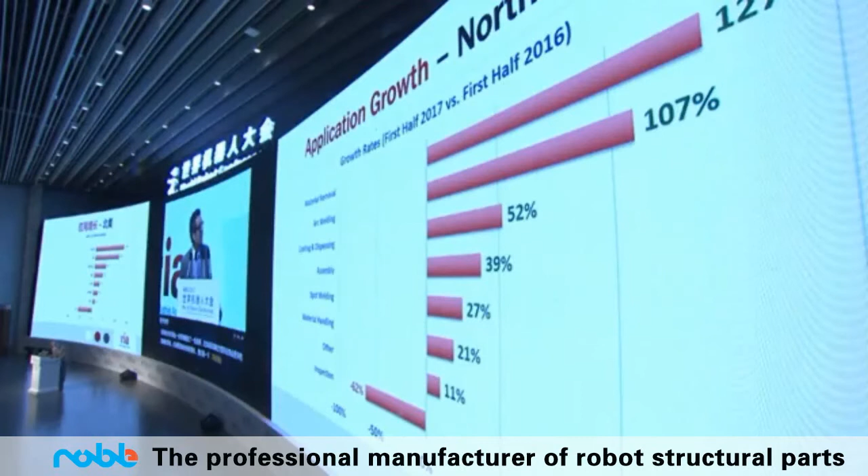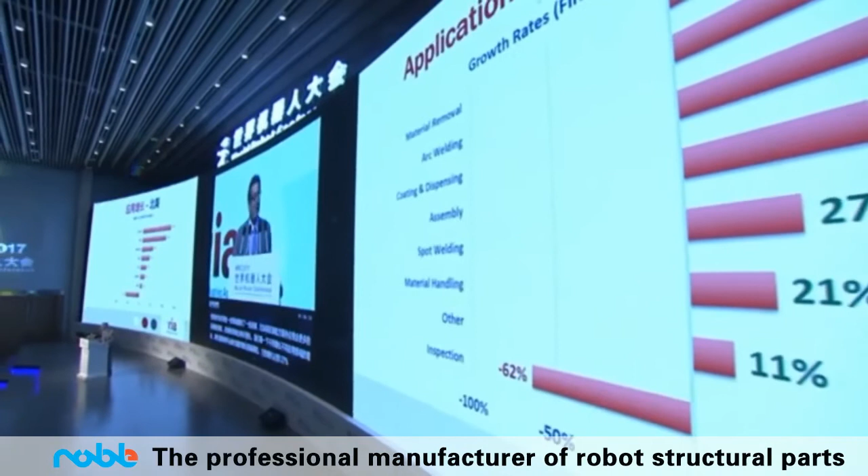As you look at these growth rates by application area, look at the tremendous growth in material removal. Small segment, but it's encouraging that we're seeing growth. Arc welding, again a big segment, growing significantly. As you go on down the line, you'll see just about every area is growing significantly, except for inspection. But again, these are small segments, so a few orders here or there can change it dramatically from year to year. The big areas like welding and even material handling, which is the largest area, are growing significantly.

So, collaborative robots is the subject of lots of discussion, not only in North America, but throughout the world. Now, in reality, there's no such thing as a collaborative robot. There are collaborative applications where people and robots are working together or in the same workspace, but there's nothing that's identified as a collaborative robot. Although, even RIA will refer to certain products as collaborative robots because it's easier, because this gives the customers an idea of what we're talking about. But there are definitions that have been established by the International Standards Organization, for instance, on what we're referring to when we talk about collaborative robots.

And these are robots designed for direct interaction with a human in a defined collaborative workspace. Collaborative workspace being a safeguarded area where the robot and human can work together at the same time. And then a collaborative operation is one in which it's purposely designed for the robots to work in direct cooperation with a human in this defined workspace.

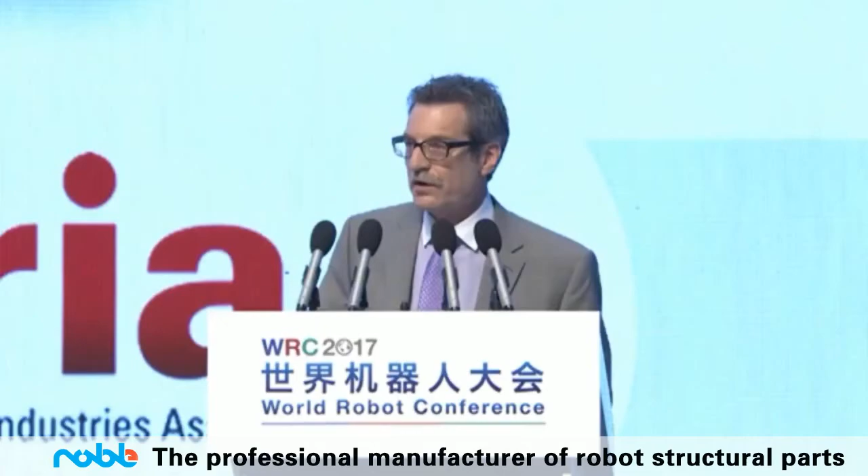Now, why is there so much excitement about collaborative robots? Well, these are the promises of this new technology: that they're simple to install and use. The great criticism of the industrial robot industry over the years, particularly by small and medium-sized companies, is that they were too complex, too costly, required too much capital investment, needed too many engineering resources internally, and so a lot of companies, particularly small companies, shied away from industrial robots. But they're very excited about collaborative robots.

Now, the costs are lower because there are no fences required for these robots. You don't have to invest heavily in these guarding systems. You don't have to have as much floor space available because the robots and the people are working in close proximity to each other. And you have reduced engineering costs because you may not even have to hire system integrators to set up the collaborative robots. So we do a series of workshops and webinars and all sorts of educational activities based around collaborative robots because there's certainly a great deal of interest.

Now, the flexibility of collaborative robots. They're not big machines that have to be in one place behind fences. They're adaptive and reconfigurable. You can move them around the plant. They're easy to train. They're portable, as I said. And so they hold a lot of benefits if indeed they deliver on these promises.

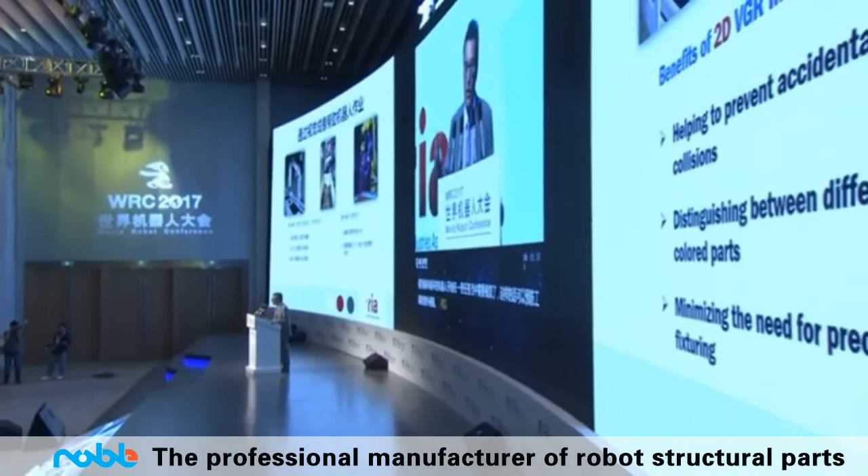And so we're seeing more and more robots with vision in tasks like preventing accidental tool collisions or handling different colored parts. And of course, bin picking, that's been something companies were working on for many years unsuccessfully, but now are able to do in most cases. So I think we're going to see continued development of machine vision as it relates to robotics.

Okay, now you get into a whole bunch of buzzwords. When I talk to people in the robotics industry in North America and throughout the world, Industry 4.0, smart manufacturing, IIoT, all these words are being thrown about as this new revolution. There's something to it, of course, as machines become connected to the internet, but making this understandable to companies has been a challenge because it seems overwhelming. There's sensors on everything and companies are being told they've got to embrace Industry 4.0 or the industrial Internet of Things. They don't really know how to do it, and a lot of companies are kind of ignoring it.

So we try to find examples related to robotics that might help them understand how it can impact them and benefit them going forward. So we talked to FANUC, one of the world's leading robot manufacturers. They're working with General Motors on a program called ZDT, or Zero Downtime Technology. ZDT is monitoring the health and stability of the robots continuously worldwide for General Motors. Now, General Motors happens to be the world's largest robot customer, we believe.

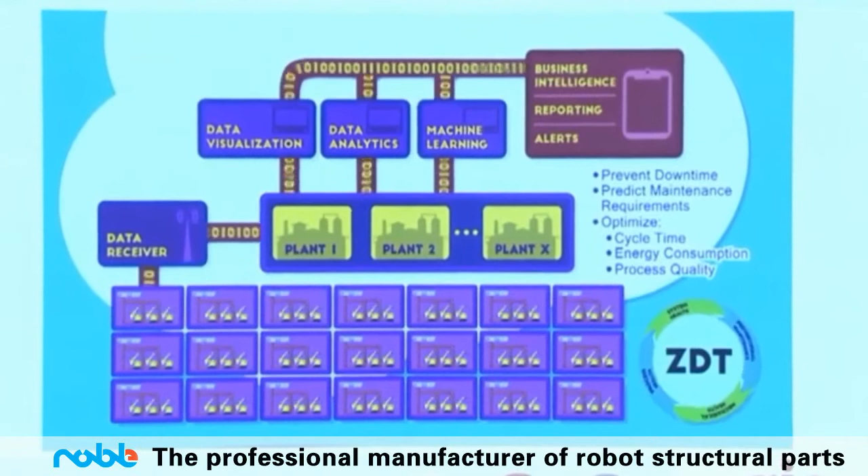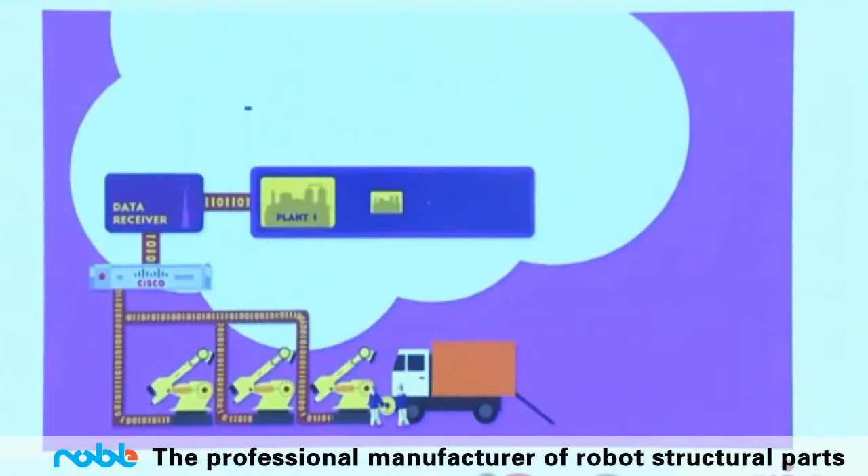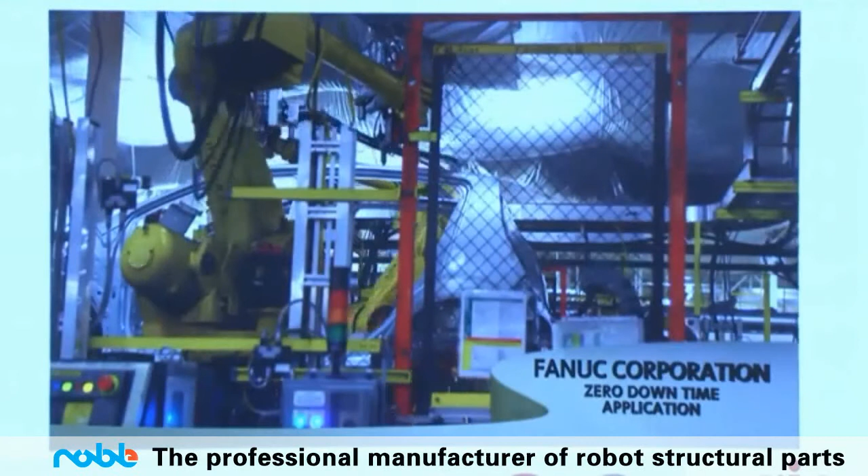ZDT is already protecting more than 5,000 robots at 26 GM factories in 4 countries. FANUC's ZDT application collects data from GM's robots every 90 seconds and analyzes it in FANUC's cloud-based data center to prevent downtime, predict maintenance requirements, and optimize cycle time, energy consumption, and process quality. For downtime, if ZDT identifies a potential issue, the customer and FANUC service team are notified and equipment is quickly directed to the site so the issue can be corrected before downtime occurs. ZDT has been 100% successful at eliminating targeted downtime and is being expanded to enhance GM's manufacturing efficiencies and world-class vehicle quality.

Okay, hopefully that also is helping lower costs of cars to the consumer.

Another big trend in the robotics market, not only in the United States and North America but worldwide, is mobile robots. When I got involved in this field, most mobile robots were following a track along the factory floor. Today, robots are moving autonomously in facilities, and it's a big deal in warehousing.

You have companies like Amazon, Walmart, or FedEx in their distribution centers and warehouses using mobile robot technology to reduce errors, speed the material flow, help consolidate storage space, future-proof their operations, and improve ergonomics. People walking miles a day or lifting or getting up on high shelves - that's not a great thing for people. It enables traceability and predictability.

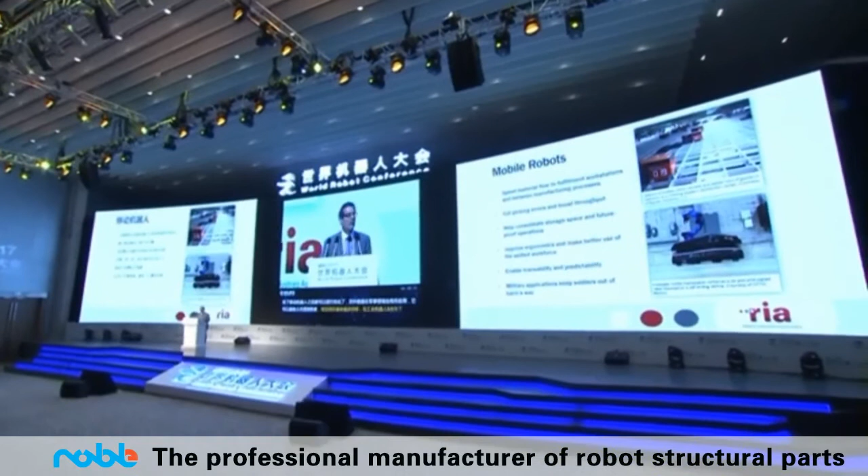And of course, we also see mobile robots in the military being used to help keep people out of harm's way. This is a big trend with mobile robot bases, and increasingly industrial robot arms are being put on mobile robot bases. This is a trend to watch - it's happening very quickly. A lot of companies are emerging in this space with very good technology.

As I said, if you go into a warehouse or logistics center, you're going to see more and more of these used, with people walking next to these robots. Their safety systems are good for the most part. There's vision used, and they're connected to the cloud in many cases. So mobile robots is a very, very important trend to keep an eye on.

Okay, government funding. We heard from the Vice Minister about government programs throughout the world, certainly the Made in China 2025. In the United States, we launched the National Robotics Initiative in 2011, and we continue to provide support - not to the extent of China or Japan or Korea or many other countries, but we are providing significant support to the development of robotics in the United States.

This Advanced Robotics Manufacturing Innovation Hub is part of the Manufacturing USA network, which we hope is going to revitalize American manufacturing and incentivize companies to invest in new technology developments. It's based in Pittsburgh, Pennsylvania, around Carnegie Mellon University.

There are state and local governments involved, universities, nonprofit organizations such as our own from all across the country. So far it's about a $250 million program, with the bulk of it coming from industry and about $80 million in federal funding. It just was recently launched - they're still getting their programs together, but there are certainly significant hopes that it will help speed the development of robots and get it into the hands of more companies in the U.S.

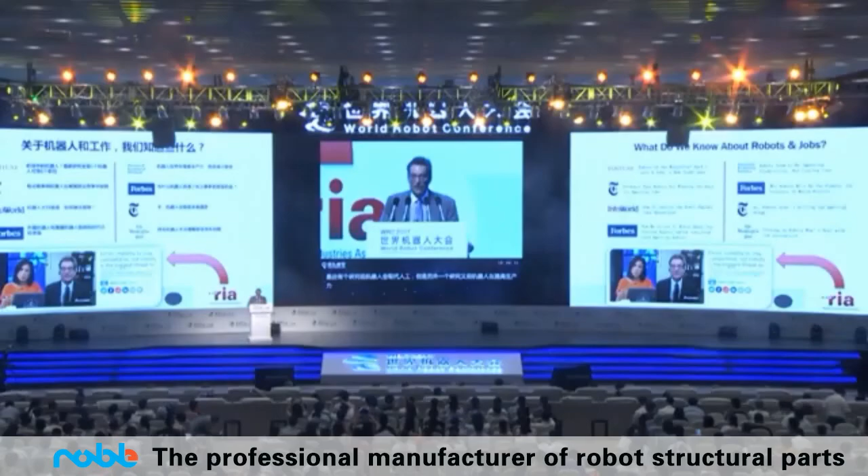Okay, I told you I'd talk about robots and jobs because this is what I talk about just about every day. People are calling, saying they read a study or there's another article out that says robots are job killers. Of course, you can go to another study and another article and see that robots are helping improve productivity and they're not killing jobs. I feel like this is all anybody wants to talk about when they talk about robotics - the impact on jobs.

So let me briefly describe our position on this. We believe that the real threat to jobs in America or anywhere else in the world is when companies can no longer compete, because that's when every job is at risk. And so automation is often used to help companies compete, allowing them to build better products at a lower cost and have the opportunity to win jobs they might not have otherwise won.

We have a website, a3automate.org, with a series of videos talking to small businesses and large businesses about why they automated and how it helped them compete. Many of them say, since they introduced the robots into their company, they won new business that allowed them to hire more people than they had before they introduced the robots. So we talk about these case studies frequently.

But for us, this is an issue that's not going away anytime soon. We try to back up what we say with facts. So we've been reading studies that said that as the use of robots accelerates, more and more people are going to lose their jobs.

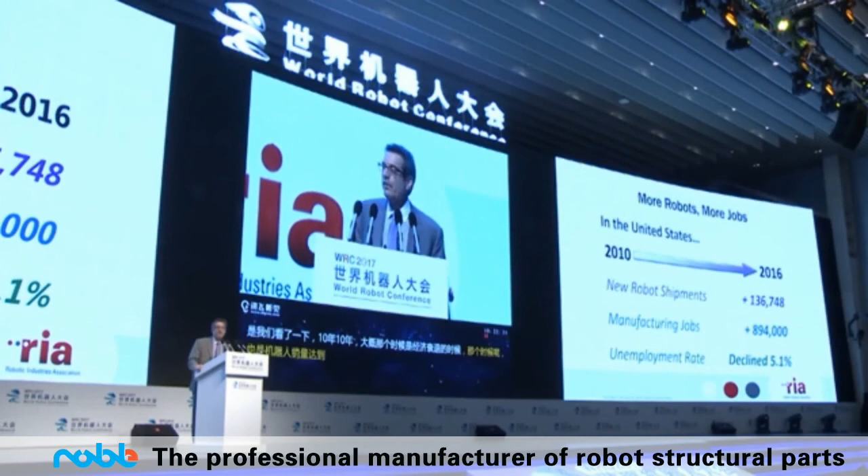So we looked at this period from 2010, when we came out of the Great Recession in the U.S. and around the world. This is the record period of robot sales in the history of time. In our country, there were more than 136,000 robots shipped from 2010 to the end of 2016. But during that time, manufacturing jobs, which had been in decline, actually increased by nearly 900,000.

And the unemployment rate, which was around 10%, fell in half - it declined by over 5%. Now that doesn't look like a technology that is a job killer.

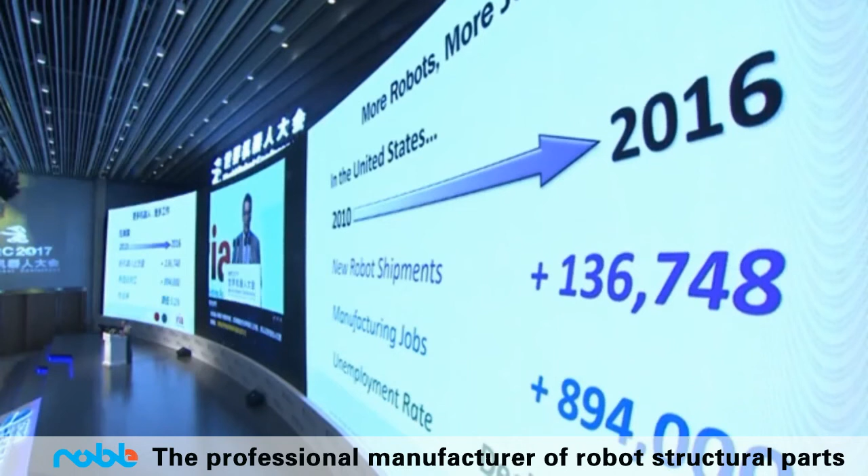We've done studies showing that from 1996 to 2016, a 20-year period, whenever robot sales go up, unemployment in the United States falls. And when robot sales fall, unemployment rises. This is exactly the opposite of what many studies and news media articles tell you. So we're very passionate about making it clear that jobs change and new jobs develop.

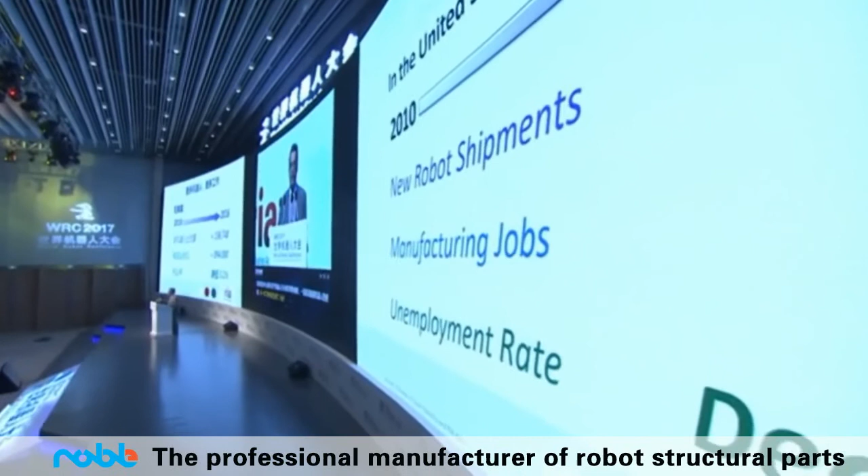If it weren't for robots, companies in the U.S. would have a very hard time competing. This is helping companies around the world compete, even here in China, which won so many manufacturing jobs. China is now the fastest growing user of robotics, in part because there's a recognition that you can't hold manufacturing jobs if you don't use the best technology, produce the best products, and get them to customers quickly. Robots help companies do that.

But there is a skills gap. If you ask our members—we have more than 1,000 member companies in our robotics, machine vision and motion control associations—they'll tell you their number one problem is finding qualified people. Part of it's due to the education setup in the United States. We're not training people for the jobs that are available now or will be available. Studies show that by 2025 there will be 2 million jobs left unfilled due to the skills gap. You can't find people to do these jobs. This will hold back the growth of our manufacturing community.

There used to be apprenticeship programs on a wider scale in the United States. They've fallen by about 40%. Germany does a good job with apprenticeship programs. We need to do so as well.

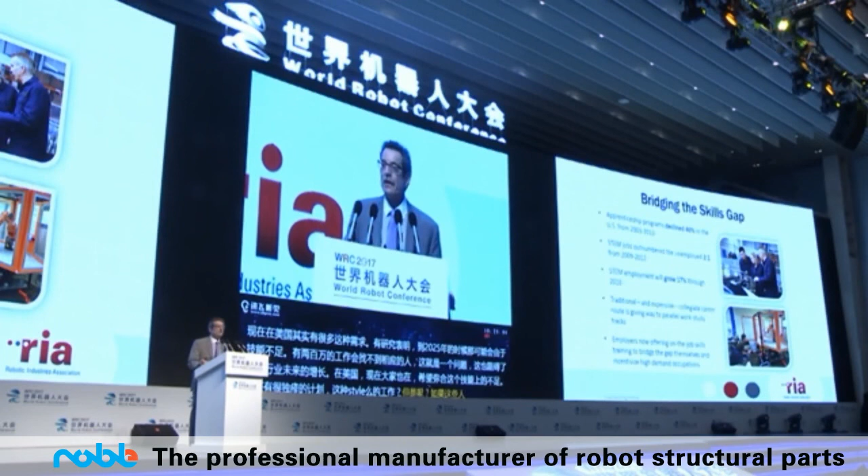There are a lot of STEM jobs out there, and it's going to continue to grow. But we've told people they have to get a 4-year degree to be successful in our society. The reality is small companies in particular are telling us we could send people to community colleges or technical schools to get the hands-on training needed to make them valuable at our companies right now.

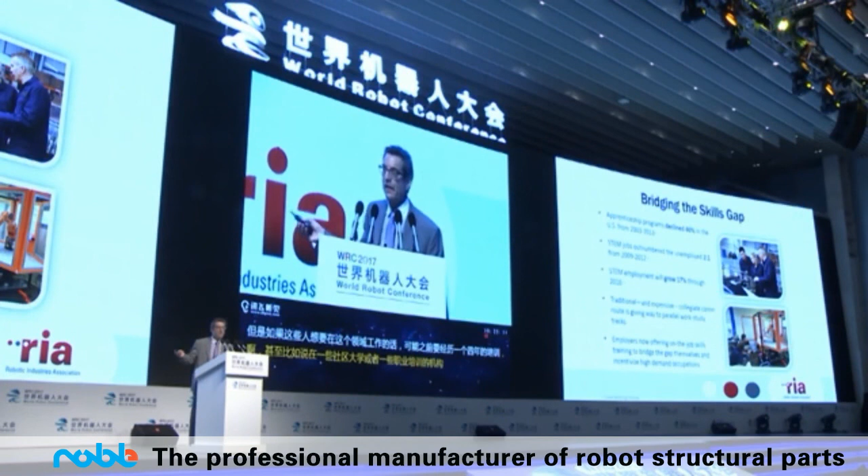Some programs are developing that provide this skills training, but it's on a very low level—on a national basis, it's not really there. You go to states like Ohio, and they've got really innovative programs training the next generation of workers and retraining current workers on the hands-on real needs of customers in their community. This is something we need to widen to keep up with the demand for skilled workers.